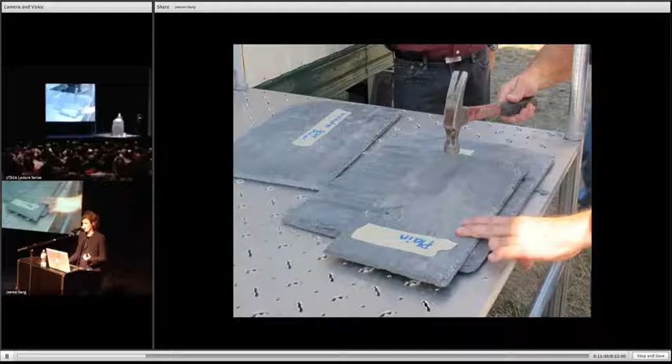Testing it, even if we're amateurs at making things and we're not the ones that will really be making them in the end, understanding how they're made really improves our sensibilities and abilities to detail for these materials. There's also improvisational play that happens in the studio and shop a lot, things that are experimented with that might not be utilizable and efficient uses over time.

But what these experiments and playful experiments do is they help build your toolbox, I guess, for lack of a better word, of things that you can deploy at a moment's notice.

A lot of times we talk about tools, we're talking about digital tools and the amazing tools we have at our disposal today. But I see the world as this uneven place where there are very analog tools and very digital tools, and we think they work best when they support each other. Just picking up the best tool for the job is often really important.

This is my partner, Mark, using just a magnifying glass as we take our working drawings and pin them up on walls, as opposed to always reviewing them on screen. This helps us catch things, make notes, and communicate with each other.

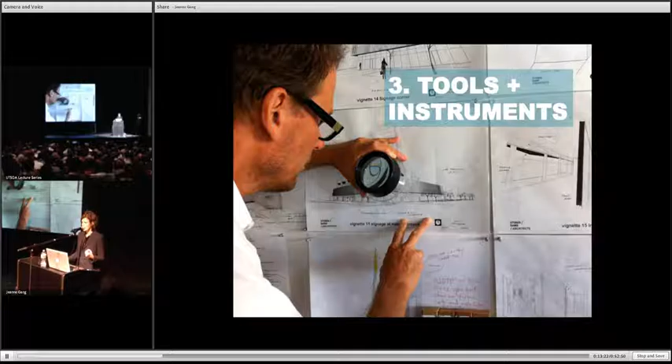There's also measuring tools. I think measuring things and understanding the orders of magnitude of things like light is a great design tool as well.

There's also just a whole series of collected things that are curiosities, and everyone brings things into the office. It's not just a rarefied collection—people bring things in and we talk about them.

Finally, there's the public engagement aspect. I know a lot of people have asked me, don't you hate doing public meetings? I used to think that, but my practice has evolved to where I think more and more public engagement is going to be crucial going forward for our practice, to communicate the desires of the people you're designing for, but also to communicate design to the public.

In our office, we also do these types of salons. This is a salon we did with Mass Studio on the topic of ownership, but we've also done eco salons, inviting people from outside into our office to have these discussions. I think these are critical.

So I'm going to come back to public engagement at the end, because I feel it's a very important part of our work today and going forward.

Living in Chicago, a city of high rises, I felt like the luckiest person on earth to be able to design a high-rise at such a young age. But since doing that, it's the one building type that I think is so particular, and we've engaged on a number of concepts throughout the world now in different countries. It's really something you build up expertise and ideas about.

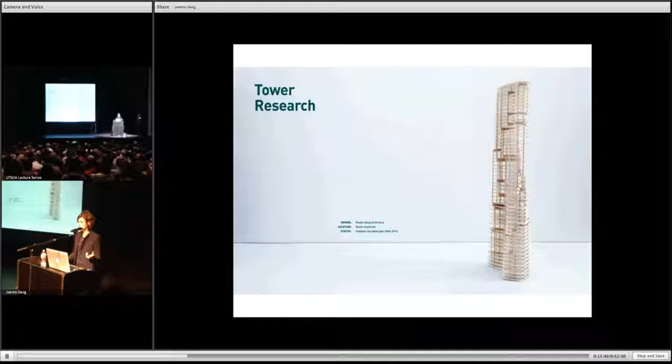The first tall building I ever designed was the Aqua Tower, which started design around 2004—almost 8 years ago now. We had originally pitched two concepts for this project, and the developer immediately picked this one because he could understand how it was to be built.

The real factor in high-rise design is time. If you think about adding just 3 or 4 days on every floor of an 82-story tower, it ends up being months of time, and that's really the most expensive thing when financing these types of buildings. So in innovating for this building type, time is really one of the crucial things.

Here we were really interested in this external spatial condition of people and sociability on the outside of the building, allowing views between other buildings, and responding to the specific site.

In the show, there's a piece—this photograph shows a number of high-rise types we've been working on with different ideas. It's kind of a morphology of ideas that I can trace back to the Aqua Tower option 1 and option 2, into all kinds of concepts like solar carving as one.

After Aqua, we worked on a tower called the Solstice Tower, where we tried to shape the building to get the best use of the southern sun in winter and keep it out in summer. Things like shaping for wind, and straddling—where a tower can't just sit directly on the ground but has to leap over something—are things we've confronted a number of times.

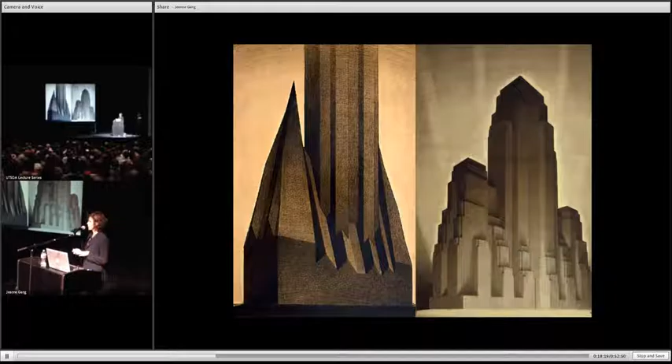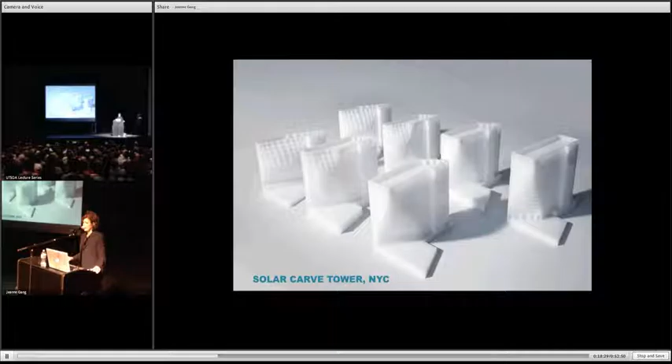What we encountered when we started to design our particular site was a site that, if you look at the zoning envelope, is right next to the High Line. We would be required to step back the building from the street, which happens to be the West Side Highway, with really no obstructions to the west at all. But it allowed us to crowd up to and even overhang the High Line itself.

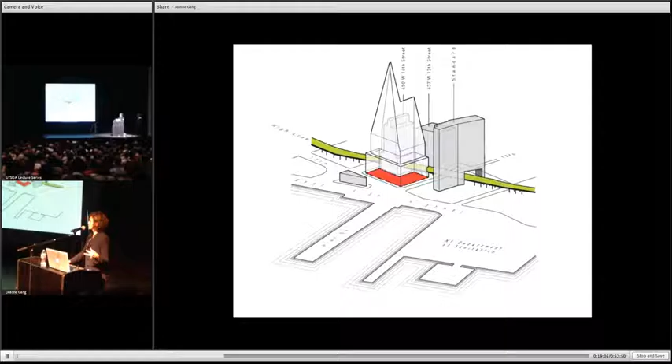So it was kind of a perversion of this zoning regulation, because it was designed to recognize that the public space is really the street and not the interior of the block. That's what's really unique about it. This would be the shape of the building. You can see here the standard hotel right here, so really just jamming it right in there.

Instead of stepping back from the street — and I should say we're in for approvals now, so I don't know if they will acknowledge this argument — because of the unique space of the public interior of the block, we decided to start solar carving and carving away from the High Line from the inside out.

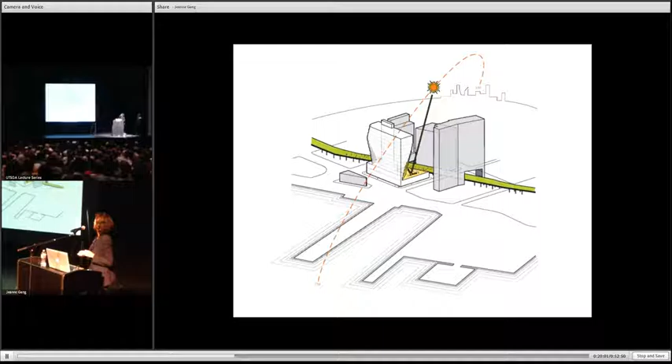You can see how this building form is cut away to provide views over to the Hudson River and to provide daylight down to different parts of the High Line, which creates, in a sense, a very different diagram, but it's based on the specific. So it's taking the concept in place for New York but applying it in a more intelligent way to this particular scenario.

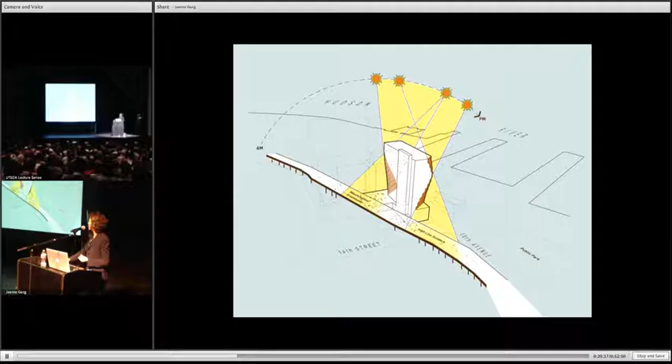The view from the High Line would be this cut-back piece, kind of faceted glass on all the parts that are carved away. From the West Side Highway, you'd have more of a straight-up facade.

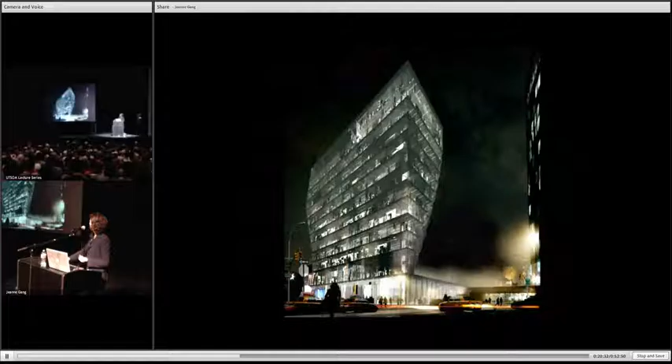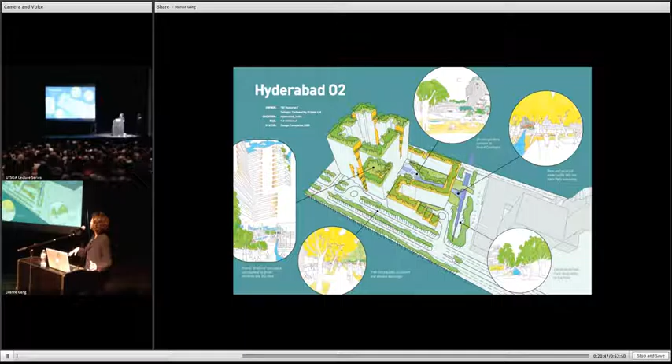Another project that grew out of these initial towers was the Hyderabad O2 project. In this case, it's almost the opposite — we're using the concept of self-shading because of the climate being very hot in Hyderabad. This is a picture of the building. It's actually 4 towers interconnected around a very large courtyard, with public spaces in the cracks between the towers.

The development of the project came about through looking at self-shading techniques, also looking at different criteria specific to the place, like using Vastu, which is similar to feng shui but comes from Hindu architecture, and using digital tools. This is parametrically studying the courtyard.

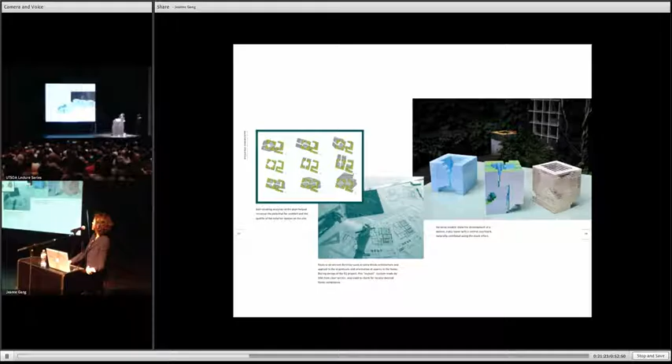In the process of designing this building, we discovered the site was very far away from a lot of factories, and I started to look at block formations that didn't need to be fired. I was shocked to find out that about 40% of the world's population still lives in earthen homes.

We ended up purchasing a compressed block machine and bringing it to IIT. I think the point here is that there can be innovations on this low end of the technology spectrum, and these things can have a huge impact on people's lives, given that so many people live in earthen homes.

So what we've been doing here at IIT is looking at compressed block, working with material scientists to look at additives, and thinking about how this building could be made almost like a factory out on its open site, where the building blocks are created without firing and thus less carbon produced. These are some examples of blocks, and then starting to look at the shapes and finding out what shapes would be easier to build with.

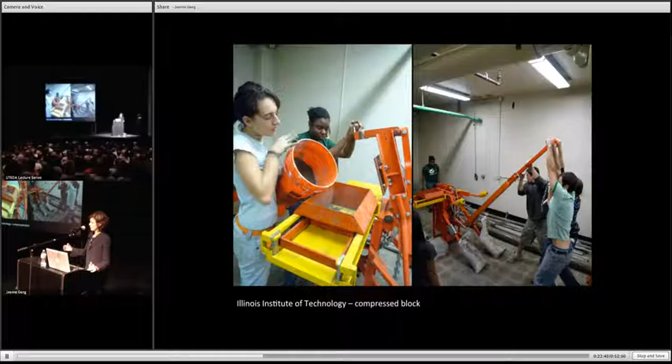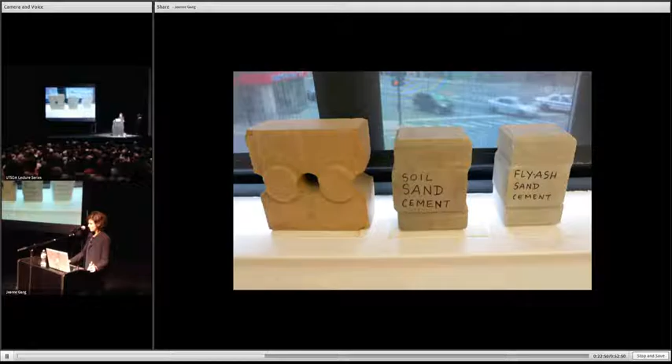Moving into wood — it's one of my favorite building materials, because it really is no carbon. Trees are actually absorbing carbon. They're incredibly tall, you can see trees that go up to the equivalent of a 30-story building, standing there. They're flexible, and there's something to be learned from trees, from wood. Like I said, there is no carbon — they're actually holding carbon. So there's a lot of new advances with technology in wood.

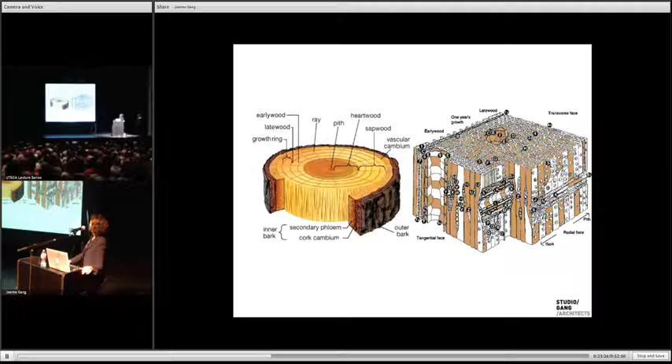One of the projects we recently completed was the Lincoln Park Zoo Nature Boardwalk.

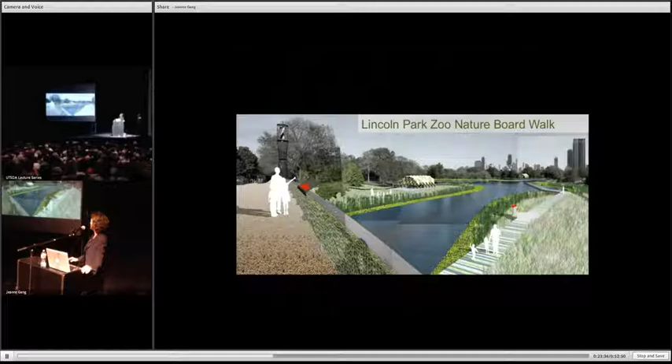And here's the pavilion that is completed now. This project used a kind of glue laminated wood, but considered the wood more like a piece of furniture, bending it in two directions.

Originally, this pond was like a 19th century picturesque version of nature in the city, with a 3-foot deep pond that had fallen into disrepair, with this historic building on the site. In addition to the wood pavilion, what we did was really think about how to reimagine the pond and make it part of the city's wastewater infrastructure system. At the same time, that enabled a whole new habitat for the zoo, almost like a zoo without cages, where animals really want to be.

These are some of the conceptual drawings, early on, of how the pavilion would be put together. You can see on the left these steps to create the laminated structure. It was the first time this process was used in the United States, so we had to go through a lot of approvals through Chicago building codes, tests and codes to have it accepted. But in the end, it worked out to be very lightweight, enclosed with fiberglass shells to make a waterproof space.

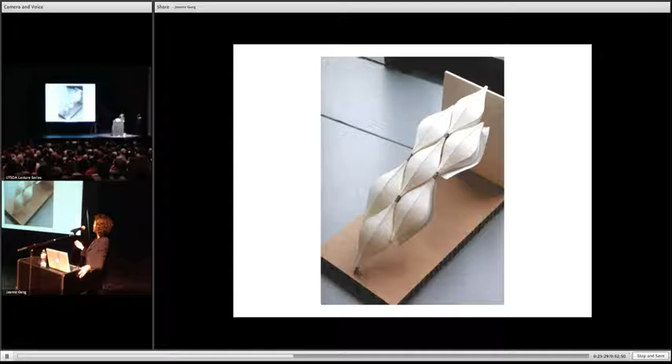Some of the early models used card and board materials intentionally, instead of doing a digital print, because we wanted to wet it and bend it and get into the philosophy of the concept. Here's some of the mock-up pieces for the wood, and here's some images from installation. But it really came out very well.

The pond now is up to 20 feet deep in certain parts, and that helps the animals winter over and live throughout the seasons. It also uses the edge of the pond to clean the runoff water that comes from all the urban areas around it.

It ties into some of this earlier research we'd been doing about animal populations and cities. What's really interesting is that the city itself has become an important place to provide habitat for a lot of different animals in order to maintain biodiversity. Because if you think about the city's footprint growing out bigger and bigger, it becomes harder for migratory pathways to run through those areas.

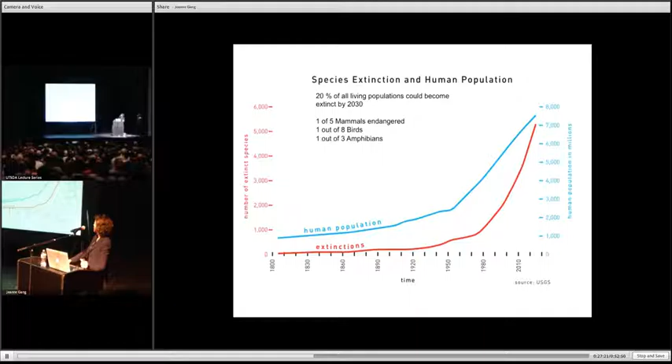Suburban areas are often just monocultures of grass, with not many different food sources to support a biodiverse population. As our own population increases, you see a lot of extinctions happening, predicted to be 20% of all animal and plant populations extinct by 2030. So ecology has been a very strong tenet in the work, and it comes out in different ways, but these research activities can then feed into the projects you're working on.

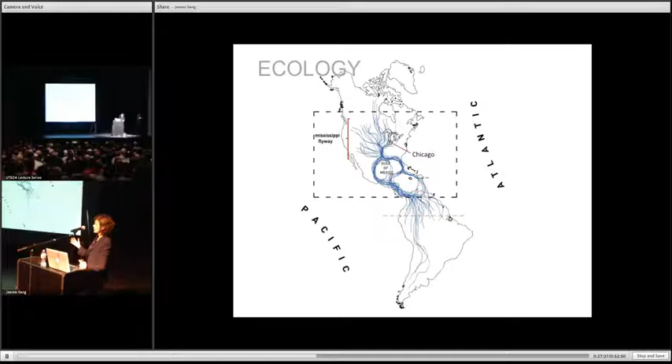The second project uses wood in a tensile way. You can see from this image, it's a theater in Glencoe, Illinois, again pushing the limits of this material and incorporating it into public spaces and buildings. We have Vierendeel trusses here, and a roof system that suspends a gallery and walkway around the lobby space, extending out into the park nearby in a canopy walk.

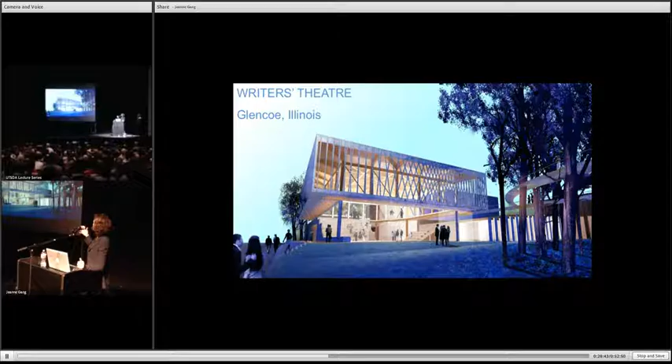In Glencoe, the history of the place is really about logging—the first settlers cut down all the trees and floated them down Lake Michigan. A bit later it was replaced with farming, and today it's actually re-wooded quite significantly. There's an interesting correlation between the logging industry and, in England especially, the development of the Tudor frame building. You could consider these Tudor buildings almost like the first modern frame buildings.

That Tudor era corresponds exactly with the development of modern theater. So we found this interesting connection, and we were able to convince the local authorities that this modern wood structure was actually very connected to history, and they bought it, I guess. It is really fascinating—think of the best theaters in history, the Rose, the Globe, all of these were of Tudor construction early on.

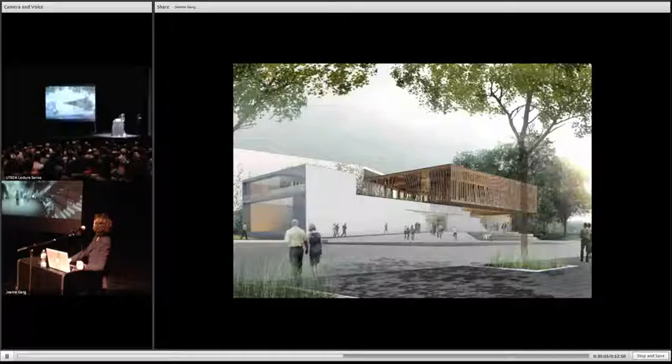And then finally, the last wood project I'll show—we're actually working on a wood high-rise right now as well, but I'm not going to show that. I'm just going to talk about the Kalamazoo College, the Arcus Center for Social Justice Leadership.

We were approached by the college to design a building type that really didn't exist before. There really isn't a typology for social justice leadership. They had a very strong program in social justice at Kalamazoo where students go to different parts of the world and do projects. They have scholars coming in to give lectures and stay at the college, and they needed this conference center that would exemplify their mission and give an identity to the building.